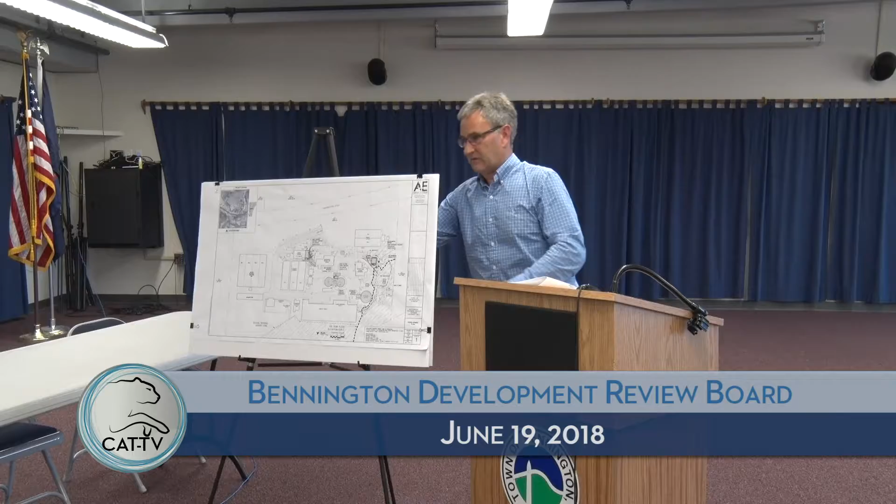Let's see, I think I can pick the mic up here. So basically, as I mentioned, we've got three major components. Duration of the project is going to be about 12 months. Construction cost is a little bit over $4 million.

The first structure, at the southeast corner of the site, is a new screenings building. It's 20 by 22 feet, so 440 square feet. There is a below-grade lower level under that which accepts the pipes, the open channel coming in. The purpose of the new screenings building is to take the influent flow coming into the plant and screen it—it's got vertical bars with a 1/4 inch opening.

What it does is remove the plastics, the inorganic material, the rubbers, that type of material. Then it brings it to the ground level. We wash it, compact it, and it goes into a pile to be disposed of there. The building, again, is 440 square feet. I will show you the edges of the different floodways here.

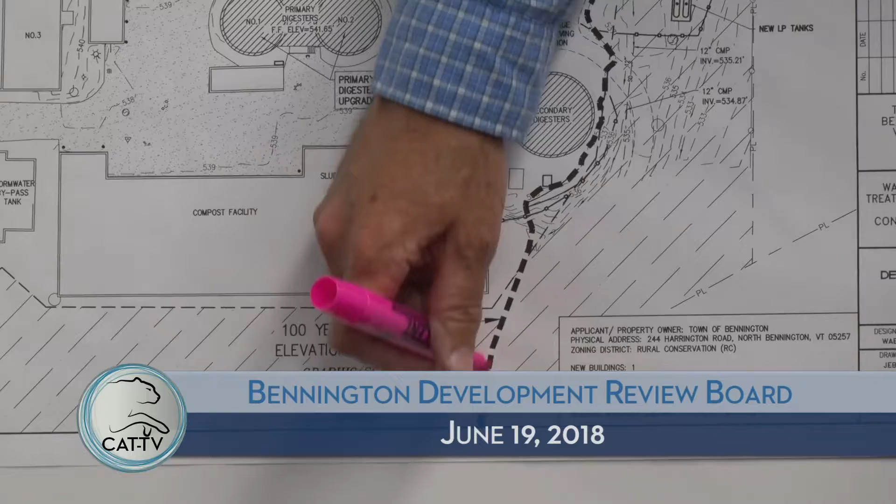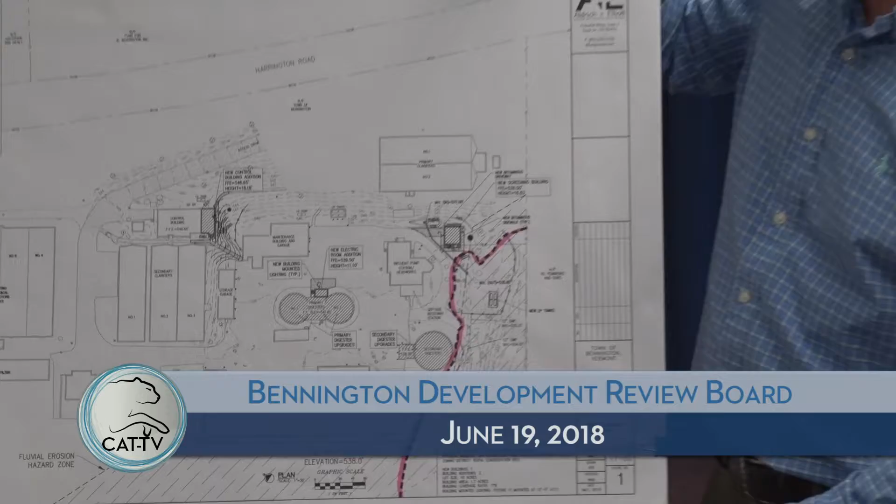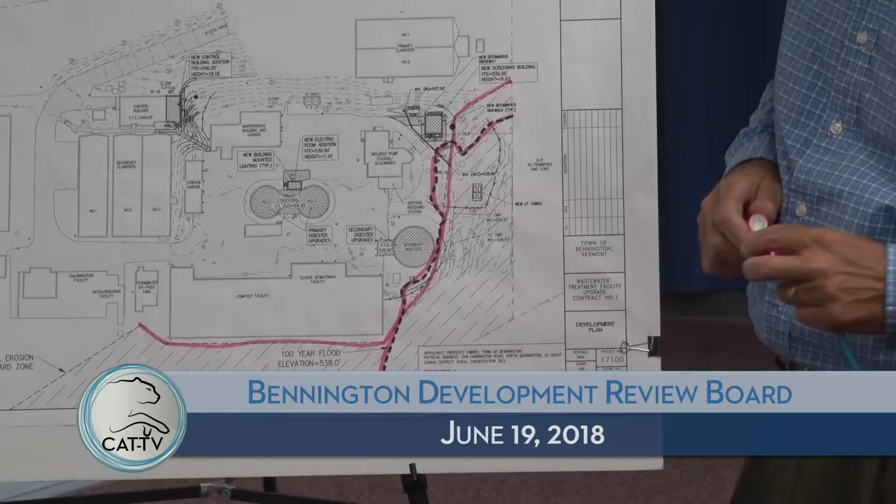The solid dash line here is the limit of the 100-year flood elevation, which is at 538. The finished floor of the new building is going to be 539.5, so we're 18 inches above the 100-year flood elevation. The state requires that we be able to protect and operate for up to a 25-year flood event; we protect for a 100-year flood event. The other dashed, hatched area is the fluvial erosion hazard zone, which runs up in this direction. You can see the footprint of the building here is both outside the limit of the 100-year flood elevation, and it's just barely outside the limit of the fluvial erosion hazard zone.

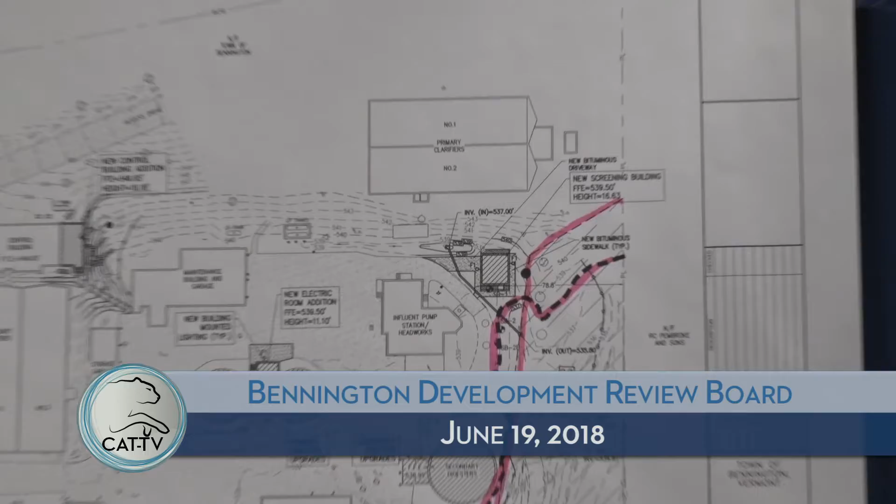There's very little grading around the building, just for the walks and to bring things up to grade. For new access, we've got a 10-foot wide paved driveway coming to the front of the building, for the skid steer to come up to the garage door and remove the screenings material. And then we have a 4-foot wide paved walk around the building for access.

We're making some minor changes to the drainage. There's an existing drainage swale that runs from the north, around the corner, and goes in the westerly direction. We're intercepting that with a new 12-inch pipe, bringing it from the northeast corner, and we're just going to pipe that by the building and outlet into the existing drainage swale that's there now.

The building itself is going to be similar aesthetically to what's on the site now. It's going to have a 10-foot interior ceiling height. The exterior is going to be metal wall panels, which we do for the R value. It's going to have cement block interior and insulated wall panels on the exterior, with a stucco finish and color similar to the existing structures on site, and a standing seam metal roof. Part of the reason we do all that is just for durability and low maintenance.

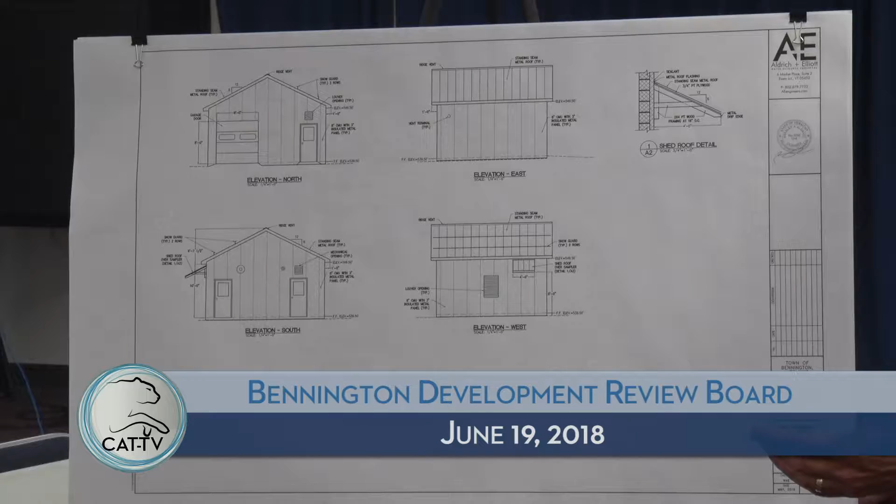This elevation here is from the north end. That's the garage door I mentioned, where staff will remove the screenings. There's a doorway on the north and also the south side into the classified space for both points of egress. And then there's a separate exterior entrance for the unclassified electric space, which is going to have the control panel and the electrical elements.

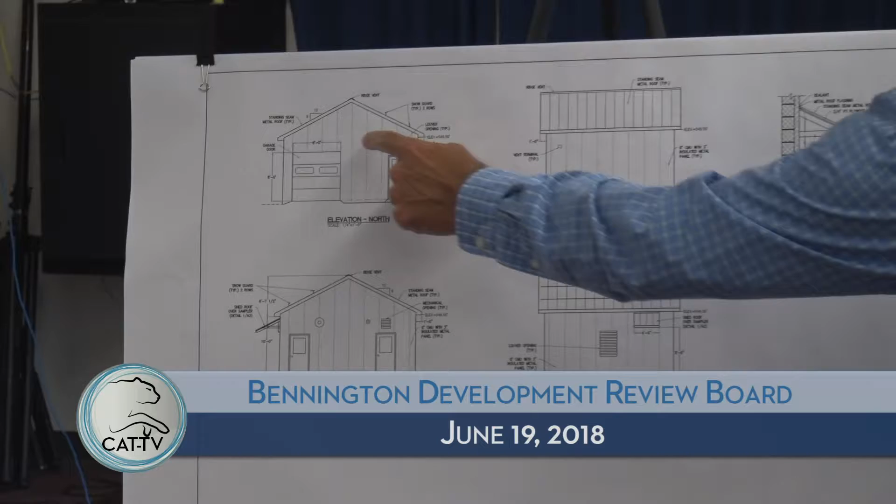For lighting, we are doing a wall sconce mounted on the north elevation, operated by a motion sensor. So if there's an alarm or anything at night at 1 in the morning, when the operator walks on the building, that light's going to come on just for access and safety purposes.

The second major piece of work, the majority of it within the existing structure, is the anaerobic digestion upgrades.

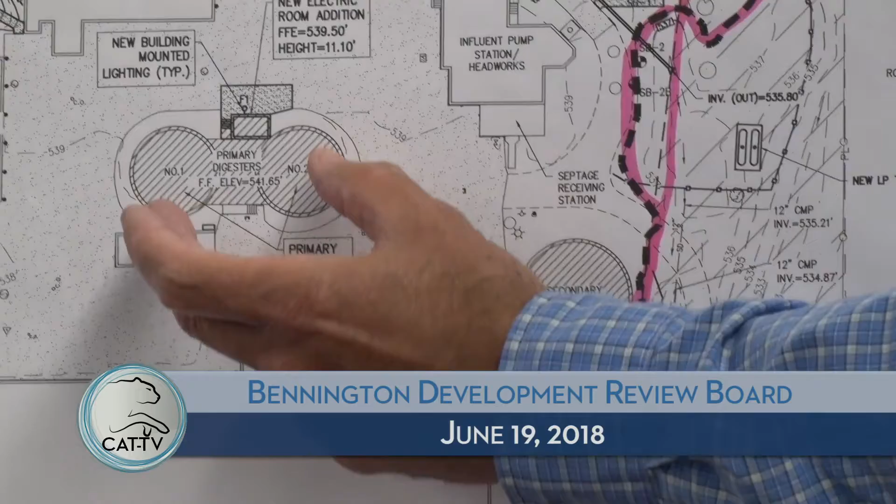If you've been to the site, you'll see the large secondary digester tank and building. All of that work is within the existing tank and building structure. You'll also see, to the north side of the site, two round oval tanks. All of that work is occurring within the existing tankage and building, which is between those two tanks.

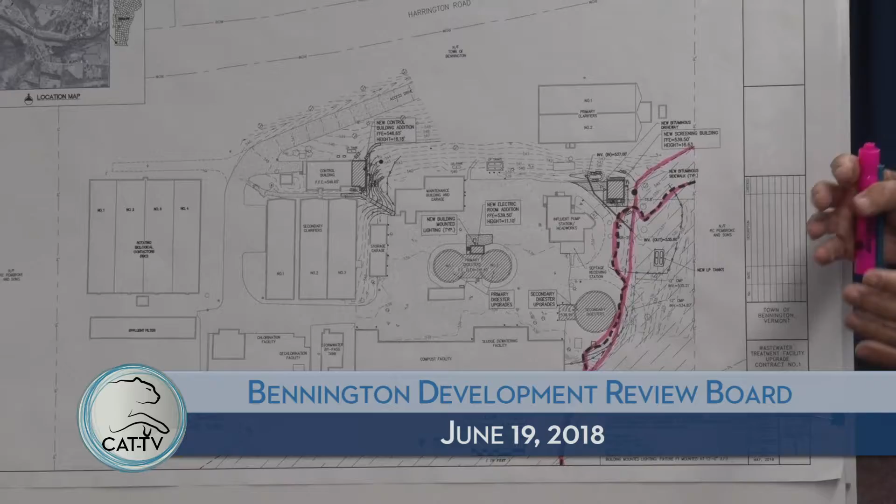We are doing a small electrical addition on the east side of that structure, 16 by 10. It's going to be at the same finished floor elevation as the screenings building, so 18 inches above the 100-year flood elevation. Same aesthetics—exterior metal wall panels to match that same stucco finish and color.

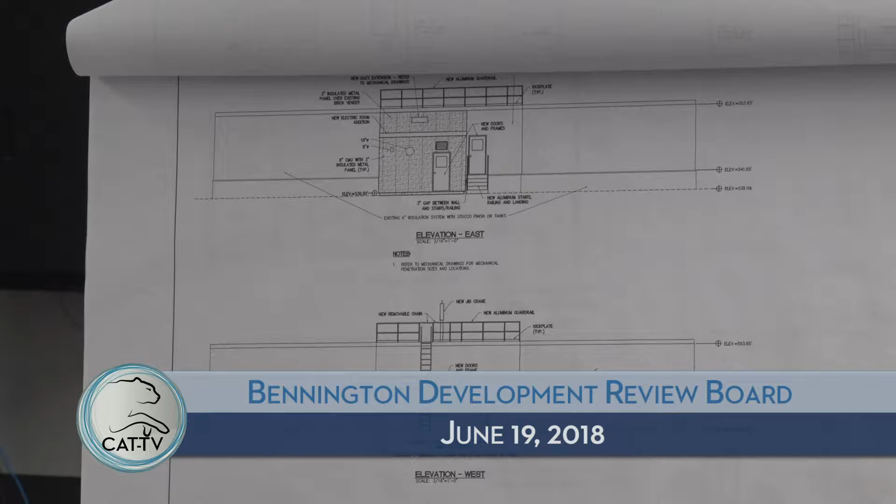The primary reason for that small addition is for sequencing. That's going to be the first thing that's done. So what we want to do is get that addition built, get all the new electrical in there, and once we've got that up and ready to go, it's going to allow us to go into the existing building and structure and start to demo and take that particular structure offline.

Same thing on the exterior building lighting—again, we're going to have an exterior wall sconce operated off a motion sensor.

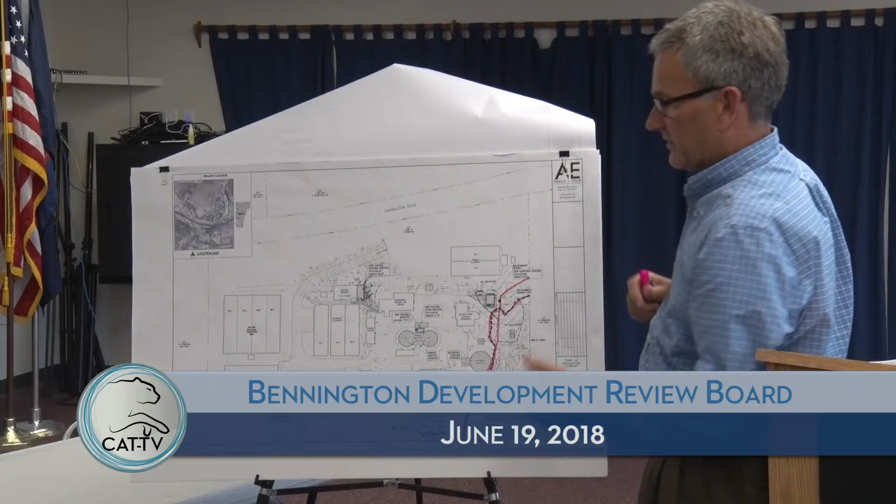The last piece of this is the existing control building. We're doing an addition on the southerly side of that, at the same finished floor elevation and width as the existing building. There's a little bit of grading on the southerly edge to tie that back into the existing contours.

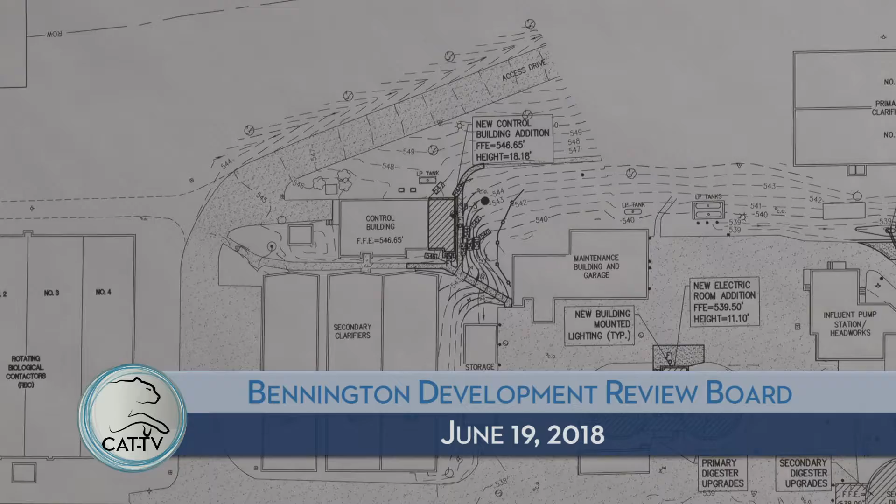A couple reasons for that addition: we're doing a bunch of electrical upgrades in the building, and we need to do this addition and some of the new electrical again for sequencing. It's also going to be a couple of operators' offices.

We're going to open up the interior of the existing building somewhat. There's going to be a new plant PLC SCADA system, which the plant doesn't currently have. That's going to allow the operators to sit at a PC with a large screen monitor, where they're able to watch the operation of the majority of the equipment on the site. It's also going to send out alarms.

They're going to be able to access that remotely—if they're off hours, they can see what the alarm condition is. Conceivably, you can turn things on and off, though we'd prefer not to do that. But it's going to give them all kinds of capabilities that a plant this size should really have, but was never built into the facility when it was done in the mid-1980s, or during the latest major upgrade.

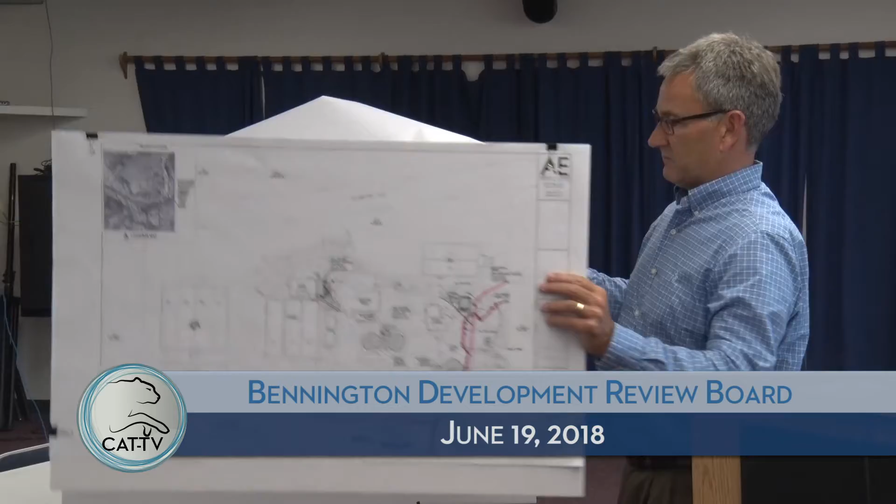Aesthetics, very similar to that. Again, the addition is happening on the south side, same finished floor elevation, standing seam metal roof, the same manufactured wall panels to match the stucco and the color as close as we can to the existing building.

And we are taking out the site light pole that's on the south side of this building. Again, we'll have a wall-mounted exterior wall sconce on there off the motion sensor, so if a guy is leaving or coming into the control building and it's dark, he can access it and find his way around safely.

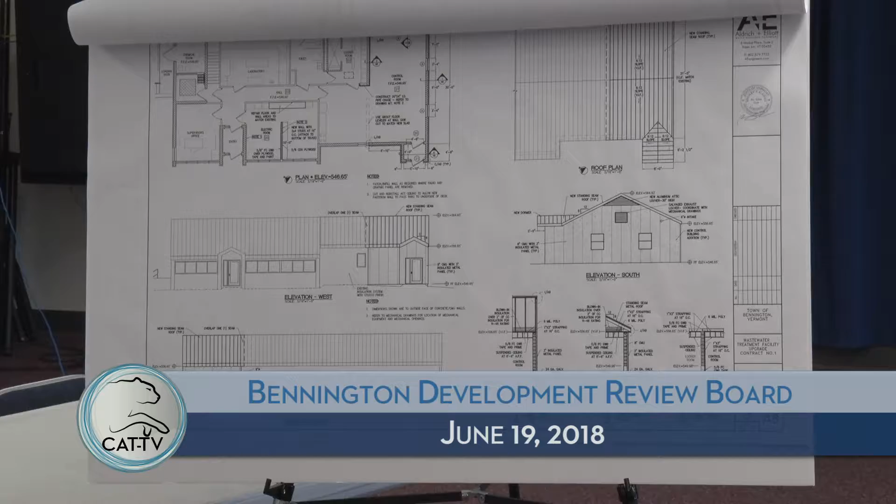The construction duration is estimated at 12 months. It is out to bid. Construction will really run through the late summer of next year, 2019.

Fire protection will be provided. That's a great addition to this facility. They've never had potable water, so the new water line that's installed will provide fire protection.

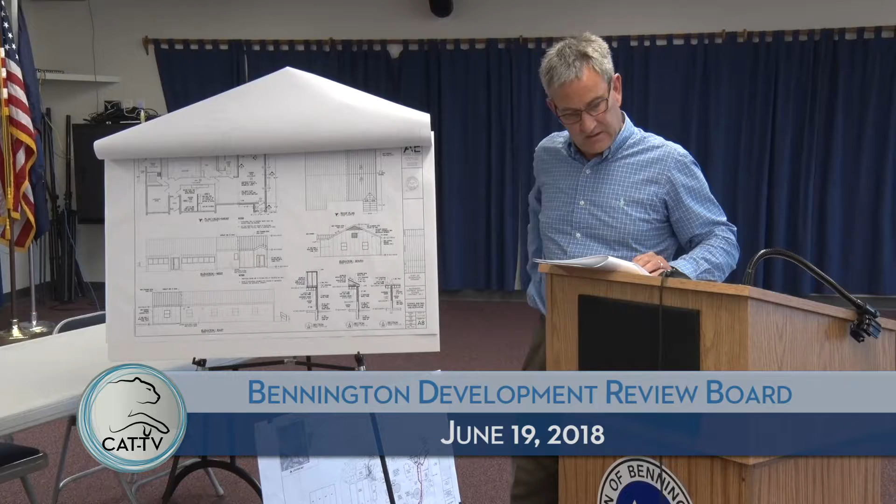Traffic will obviously be temporary during the construction process with trucks and construction activity, but once the project's complete, there's no change or additions to the existing traffic patterns. Again, this has been the site of an existing wastewater facility since the 1960s.

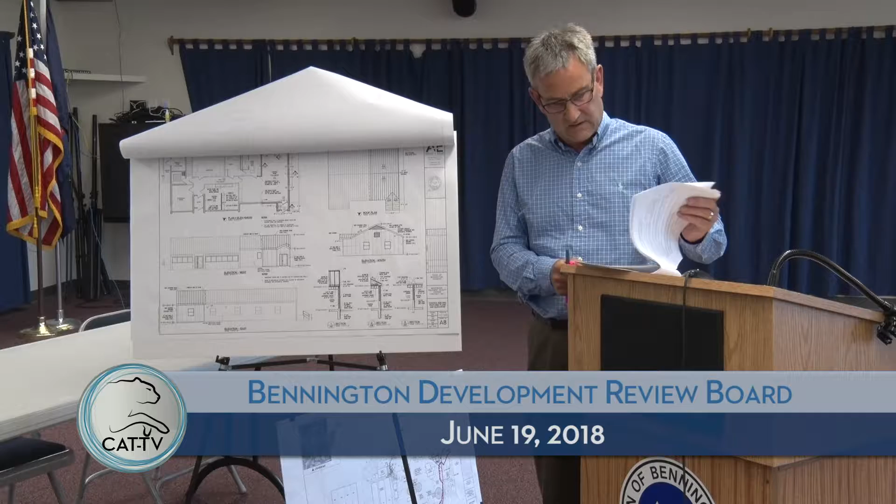I think I covered everything. Does anyone have a question?

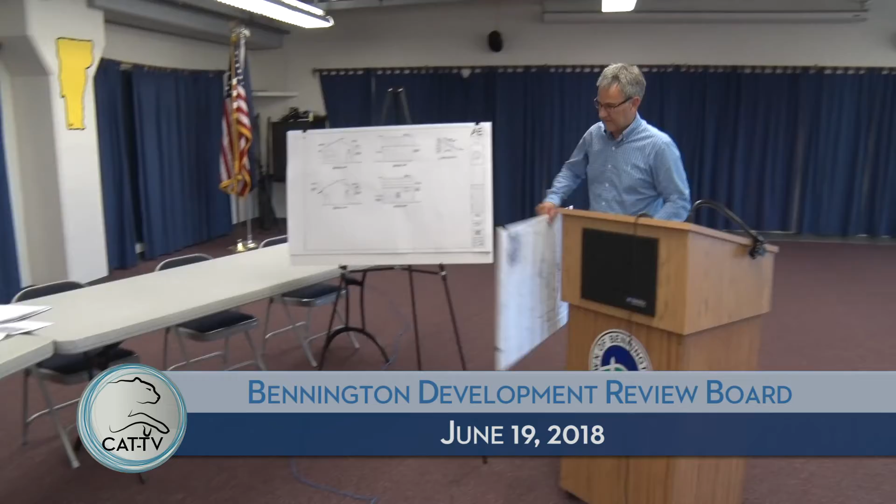Bill asked: the new LP tanks, where are they in the floodplain? They are below the 100-year flood elevation, and we are working that into the design to make sure those are tied down as required by code. It wasn't my preference to put them there; that's where the staff wanted them because of snow removal and access, so that's where they preferred they be located. There's going to be 2,000-gallon tanks there.

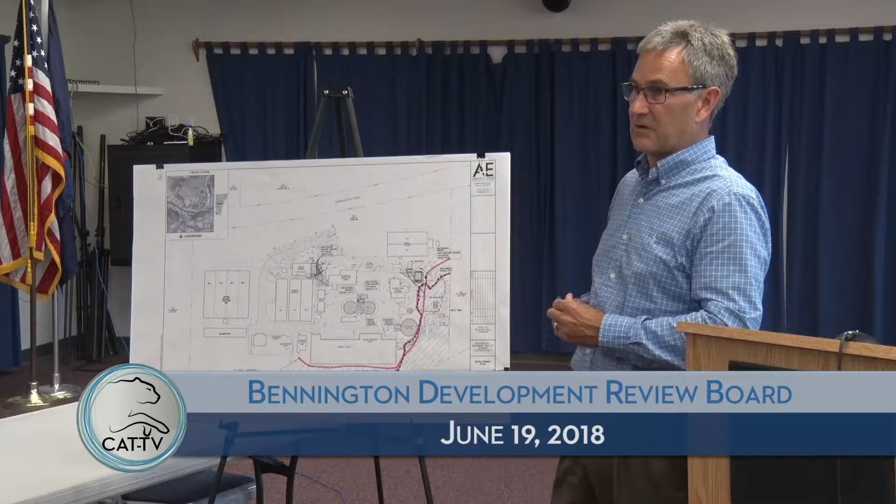One of those tanks is going to serve the existing headworks influent pump building, which is part of a separate contract the town's doing. They're replacing the boiler, the heating system in there, so once that's done, that's going to pull off one of the new tanks. The other tank is going to heat the new screenings building. The design will incorporate the tie-down for those because they are slightly below the 100-year flood elevation.

You're going to pour concrete and strap them then? Yes, absolutely.

Just out of curiosity, because this is an upgrade and not a whole new project, the 10 acres does not trigger Act 250, does it? No, I don't think so. We're required, since it's state funded, to go through their environmental review process. Really early on, we get a determination from Act 250. Typically, if it's an existing site, it doesn't trigger a permit or amendment. The only time that would generally happen is if you're increasing the capacity of the facility or doing something significant.

Any other questions? It's really not related to the plan, but will the upgrades reduce the odors coming from the plant?

Not really. The screenings building is kind of a new addition; that's contained, it's a classified space with ventilation systems. The digestion will pretty much operate as it does now. We're replacing everything, but it's really age-related driven, so there wouldn't be any change over. The functions are essentially the same.

Just to clarify, when we did experience odors, that was a failure of the RBCs. Four rows are being replaced, so it shouldn't experience that problem anymore. That's a separate contract which the town's doing.

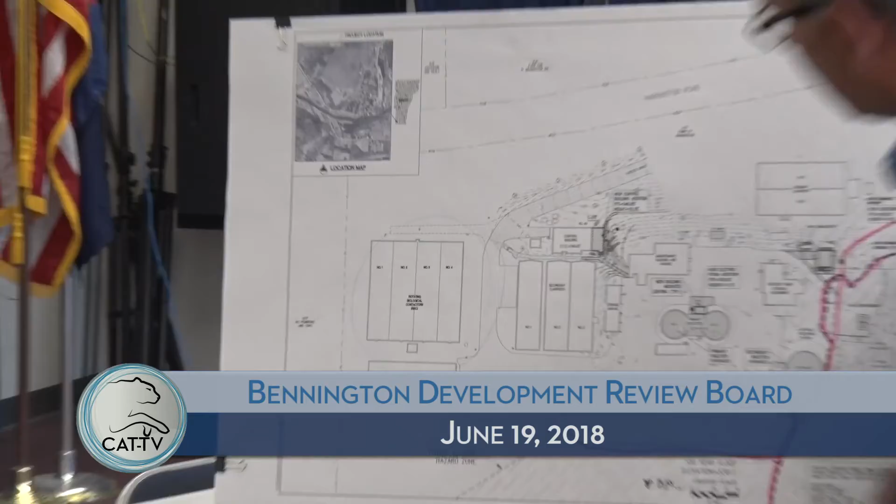Over the last year and a half, those odor issues have really been attributed to the RBCs, which are in this part of the liquid stream, the biological process. They have replaced 8 of those, and then done the second train, which is another 8, so they've done 16 of those, and those are to be completed by the end of the year. Once that's done, that's going to address the process issues and the odor issues that have occurred over the last 18 months or so.

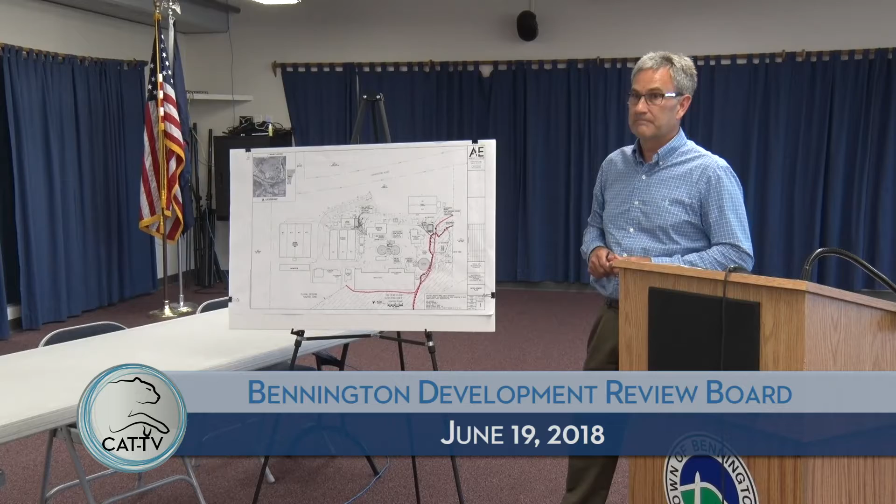Okay, what's your decision, guys? Harry moves to approve as presented. Dan seconds. All in favor? All set, Wayne? Great, thank you very much.

Thanks for the information. Tried to keep it short. I'd love to talk about process, anything on there, but tried to keep it to the application, and it's a nice night. But I love to talk about wastewater plants.